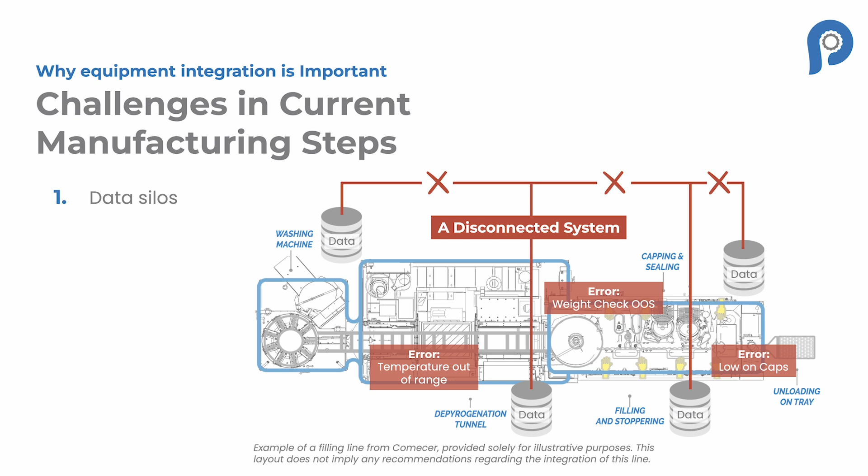One thing about bringing your equipment into your automation system is it allows you to adjust your processes dynamically based on your sensor data, reducing batch failures and waste. Things that we would bring into the automation system are anything that provides dynamic data, such as temperature, pressure, flow, humidity, anything to help enhance consistent product quality.

Another important thing that happens when you bring in your equipment is your regulatory compliance and data integrity goes up immediately. This ensures compliance with FDA 21 CFR Part 11, which as a pharma manufacturer, we all know is important to create electronic records and audit trails. Good QA, QC is dependent upon consistent and accurate data.

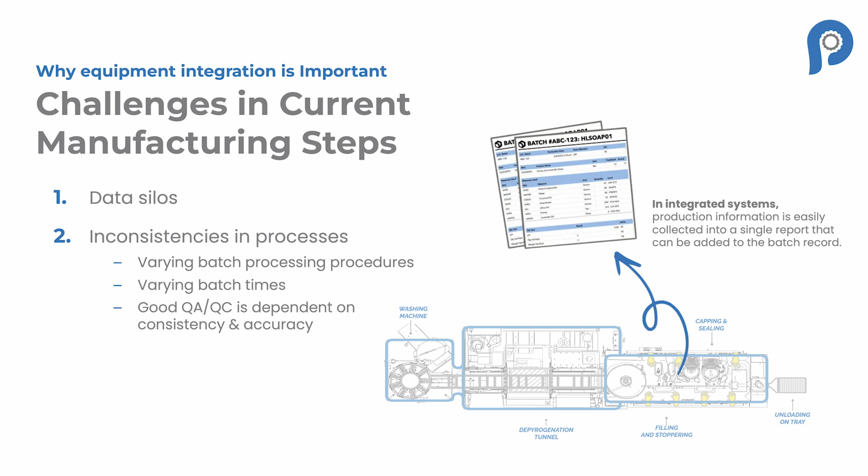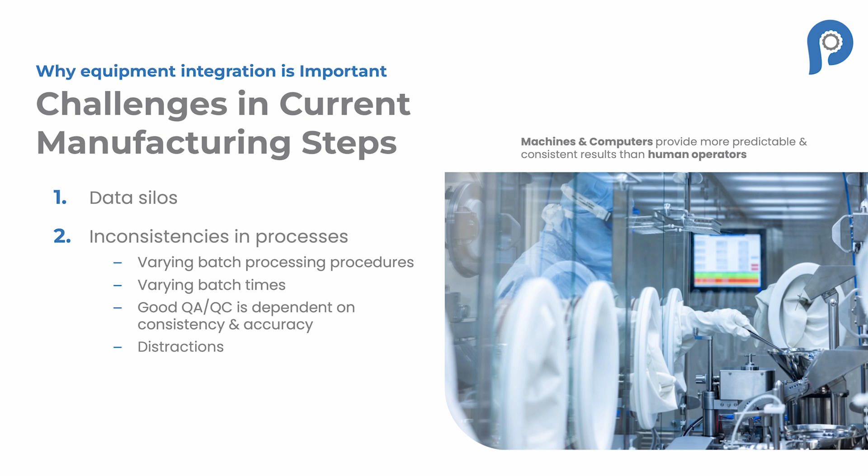Automation prevents distractions. It prevents varying actual batching times, inaccurate ingredient amounts, overages and underages, which also creates an economic barrier in your processing. And also, automation allows for varying batch processing as needed on demand. Increased efficiencies and reduced downtime through manufacturing execution systems and ERP integration is a big part of streamlined workflows and reducing delays in production.

Human factors are a huge part of inconsistency in our plants. Automation reduces the interface with humans. Not that humans haven't done a good job over the years, but with the digital world here today, it's a part that we can alleviate and increase our operations, our consistency, and our accuracy. Quality control and traceability is another big factor of reducing human interaction.

Next point is cyber. The world we live in is digital. Cybersecurity is a big concern in the manufacturing world today. And PharmaPhixx is taking that head on with OT and IT crossing and how we can have a better defense before we have issues in our businesses.

If you live on the East Coast, one of the biggest stories that happened a few years ago was about Colonial Pipeline and shutting down their ability to provide fuels to the East Coast. And this all happened because somebody took control of their control room and their ability to move their product and to log it safely. And it literally put the East Coast at a standstill for a long time while their system was held for ransom. A lot of these cyber teams, that's what they do.

They hack, they request a ransom, and even though they say you may get everything back, you also may not. And a lot of these companies require a lot of money to get your system back. I think it's actually a requirement now for most all businesses to carry cyber insurance. But just because you have it and just because they pay it doesn't mean you're going to get it back.

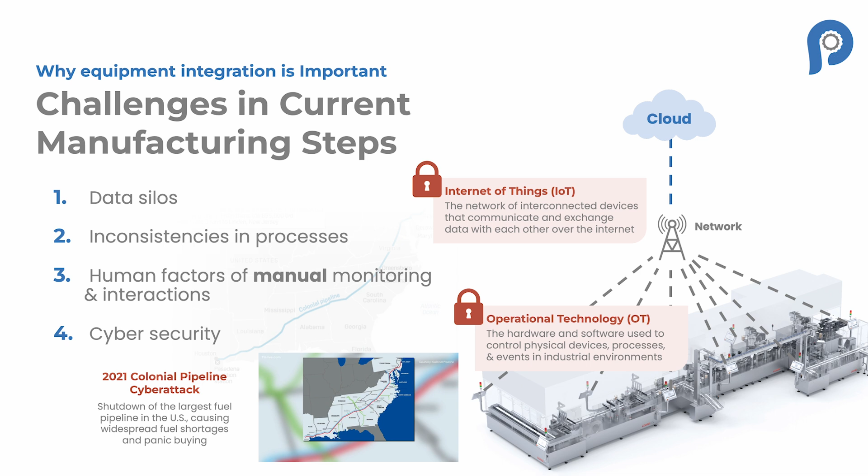And luckily, we had good backups, we had a good cyber plan, we had a good cyber team. We were not held for ransom and we lost no data. So again, having a good plan, having a good team, having a good strategy is key to having cyber protection.

So why do we have a centralized control room? Well, as we know, data and information is king. And so having data logged and having it where we can go back and see why things happened, when they started, we can not only fine tune our operations and drug recipes, we can also track when an event happens.

We can do preventative maintenance from the data that we've recorded and monitored and analyzed. Predictive processing and adjustments is key to having accurate product and logging regulatory compliance and data integrity. Center point for all operations, a second layer, a net defense.

And when I say a net defense, I think of casting a huge net over your entire manufacturing organization. That includes your administration, the interface between administration and manufacturing, and then manufacturing and the network that your manufacturing lies and runs on. Safety is number one.

With more data, we also prevent any incidents of it happening. We also know that we have, again, drug compliance, safety compliance, and data integrity and regulatory compliance. Why is a central control room better? Enhanced productivity is the number one reason that we collect data.

Next is we ensure consistency, the ability to automate repetitive tasks that used to be manual, again, reducing human interface. Continuous monitoring. These systems never take a lunch break and never go on vacation. So continuous monitoring allows for fine tuning and corrections, ensuring all products meet specifications and optimal quality standards. This is key.

Also, secure data access. We all have phones, and we know data breaches and cyber protection, again, is key. So the data we collect, it's important that we protect it. And a centralized control room allows us to secure that data in an easy location, and it allows for compliance and audits to become more straightforward.

Next on our list, I'd like to talk about the benefits of an integrated facility. Again, OT and IT have crossed in the world we live in today. Operations and administration have crossed. Our accounting, our materials is integrated with our operations.

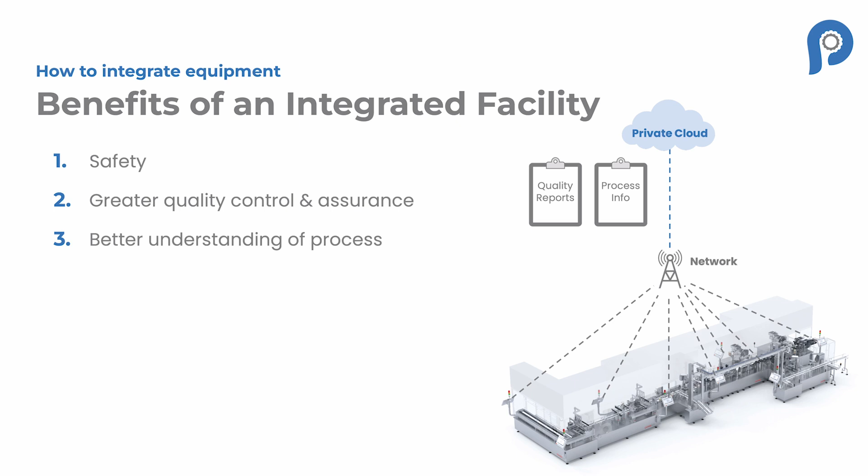Having an integrated facility not only ensures safety of the operators that work in the facility, it enhances our QA/QC from an ability to report and produce the data that we've collected over the years. It also gives us an easy understanding of how the process operates and how things happen during the process. Data utilization is huge, less downtime, predictive maintenance, as I've mentioned before, reduction of waste in utilities and manpower. Again, it hits all of our bottom line.

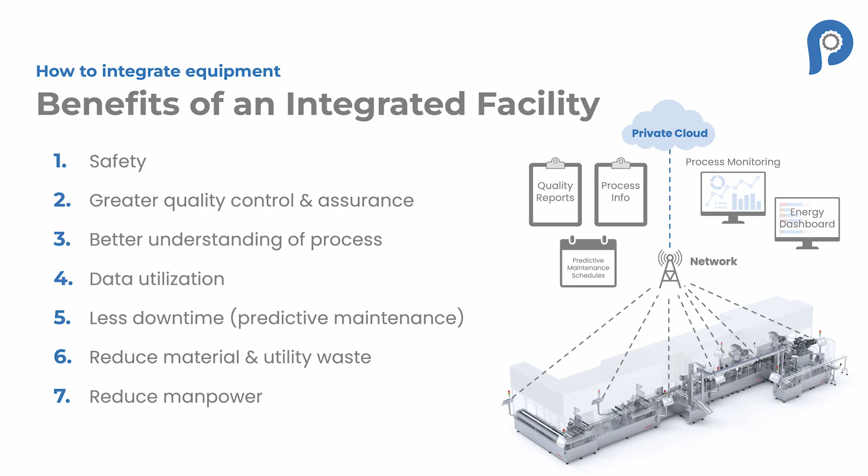How do we integrate this equipment? Well, we start by understanding what you have in your plant. People like PharmaPhixx come into your facility. They try to understand your processes and understand what you have operating between the equipment and the instrumentation in your facilities. What kind of data those instruments produce and how they interface with your equipment is key.

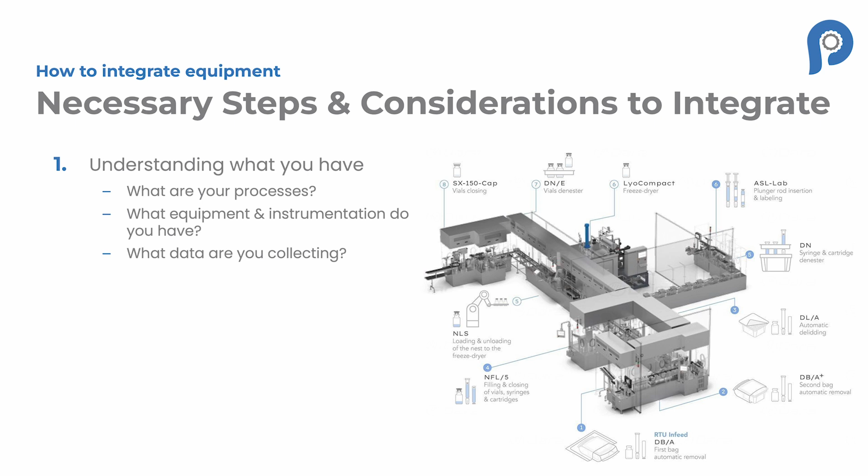We look for things like P&IDs, which are drawings that show the equipment, the layout of the facility, the manufacturing, and how those pieces of equipment interact with each other. Also key is your network. What kind of network do you have? How does it work? What is its backbone? What kind of media does it have? And how does it communicate?

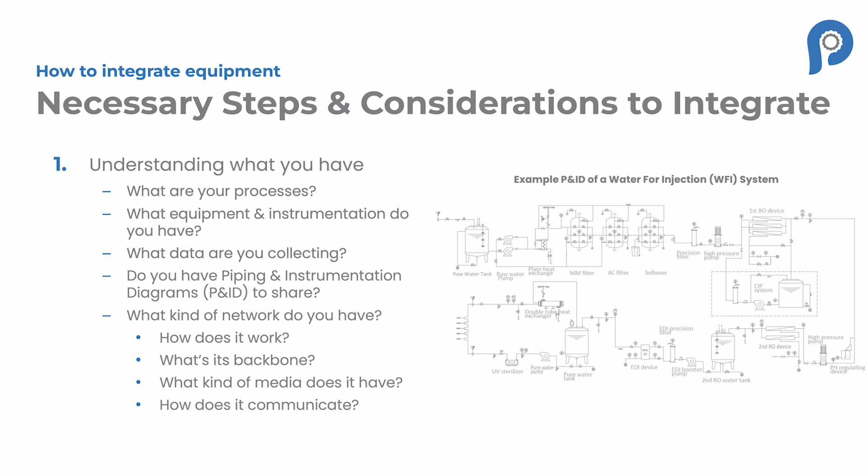And of course, we want to understand what kind of protection it has and how it is vulnerable to the outside world, to failures, to lack of maintenance, and being upgraded on a regular basis so that it is staying consistently on the forefront of protection.

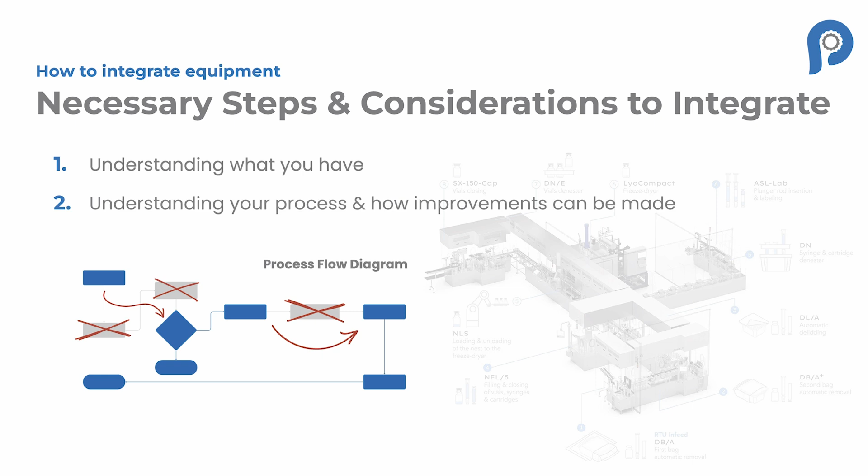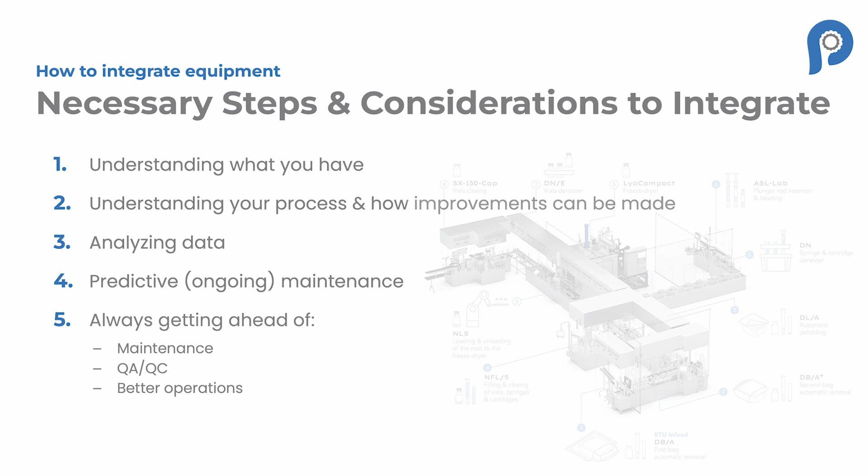Also, analyzing data is huge. You collect a lot of data, you have to know how to analyze it. From that data, we prepare predictive maintenance and adjust our operations accordingly. We always want to get ahead of maintenance and QA/QC and make sure that we are meeting all the requirements of the regulatory enforcement agencies.

Next, let's talk about centralized reporting and reporting the data. Data is a vast ocean, as we all know, and it does take up a lot of space. Think about your car. If you have a new car, your dashboard has everything, not only on your dashboard, but maybe even on your windshield. Everything is at your fingertips. You want your plant to be the same way. You want to know everything about it, every temperature, every pressure with a click of a button.

You also want to be able to export that to administration if needed so that they can predict material usage, workflows, anything they may need as well. So a little bit more about the centralized data, the data that you have that you can analyze. We can use it not only for predictive maintenance, but predictive monitoring of the process, which allows us to do real-time process adjustments and optimize our production in our batches.

Endless logging data is huge, not only for regulatory reasons. It allows for adjustments for real-time data tracking, electronic batch records. It also allows us to see how our sensors are performing, our equipment that we put in our plants, and how, as time goes on and technology gets better, we have to improve on those types of equipment that we have.

Regulatory compliance and data integrity. Again, data is a huge, vast ocean of everything from how the batch was operated to the equipment performing. So endless log data for reference for the future. We can use all that data and analyze it to make seamless quality and traceability for our operation. Management loves this kind of thing because they can get automated reporting. Everything from process progress, cost, preventative maintenance, resource usage, batch times, and process specifics related to the operations.

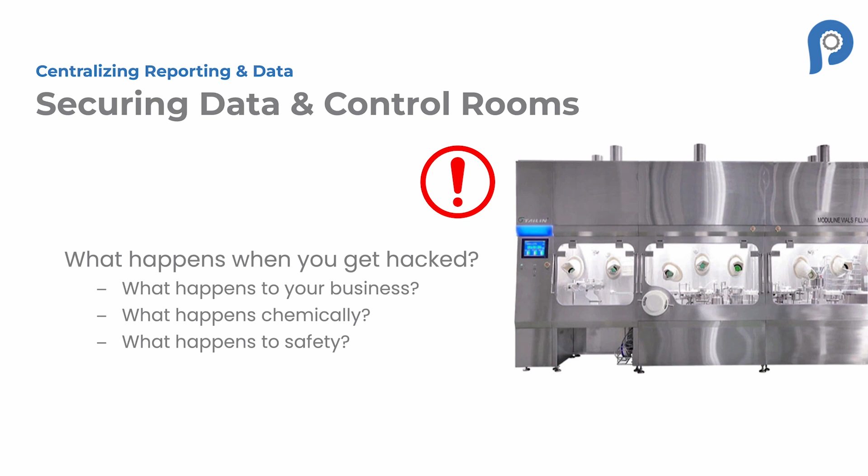Securing data rooms. I worry about it with my car these days because now everything can be hacked. If you think about it with your car and somebody hacking your car and being stuck sitting at a light because you can't move your car, imagine what happens on a manufacturing floor when everything stops, gets hacked. Not only what happens to your business, but what happens chemically, what happens to the safety you have no control over. So securing data rooms, securing your operations is key. If you want to have the best quality, the highest output, and the greatest cost efficiency, this has to be at the forefront of your concern. Secure your data. Cybersecurity is a real thing, and it will change everything else you do if you get hacked.

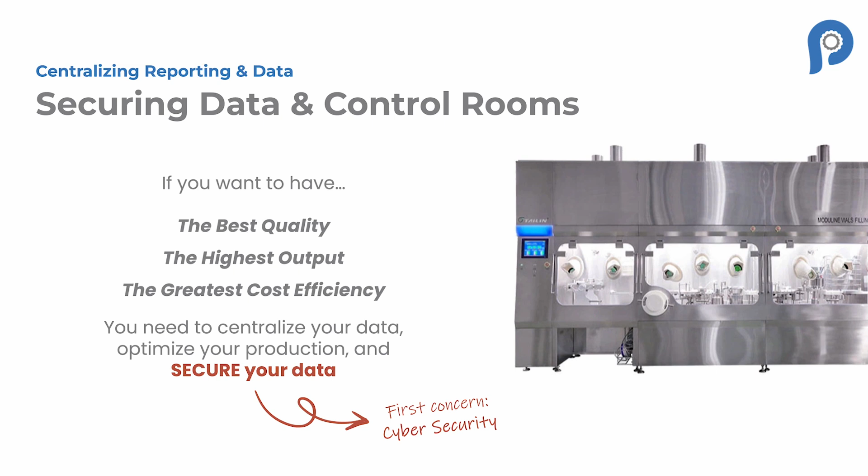Creating automated workflows. One of the best things about having your data at your fingertips and understanding your processes is creating automated workflows and removing human interaction. When you have human interaction, you're going to have issues. Again, humans are imperfect. It's just what we do. It's how we are all built. It's how we all operate. Once your data is centralized, we can create code that allows things to work automatically. It reduces the downtime, it reduces human interaction, and it reduces defects.

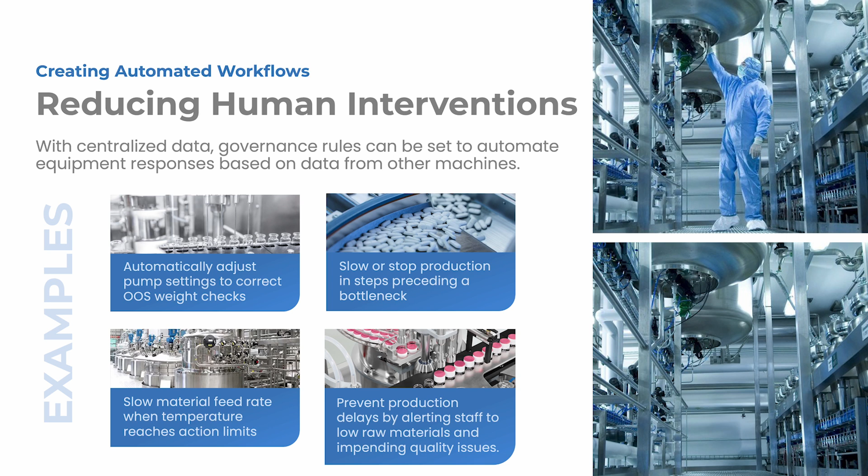What happens when things are automated? Automatically, your processes happen. So your pump settings become automatic. People don't have to go and close a valve or type in a number on a small touch screen. Production times are adjusted accordingly, preventing bottlenecks. And again, your material usage is automated. This will alert the staff before your materials get low, and it'll constantly check on the quality and reach out for actions that are required by the staff.

What do we do to automate your processes? One is understanding the requirements of your process. A team will sit down with you and your operators and your scientists. We want to understand what's required and where are the fallacies? What are we trying to prevent in your processes? Understanding the equipment you have, understanding how we can tie those into the network and how we can control those. We want to understand what are the specifications and standards for your facility.

Lastly, designing a centralized control room. How is the data going to be brought in? What kind of network? Is it going to be fiber? Is it going to be wireless? How are we going to protect those things with cyber coming in? How is everything going to interact, not only on a digital basis, but on an operations basis?